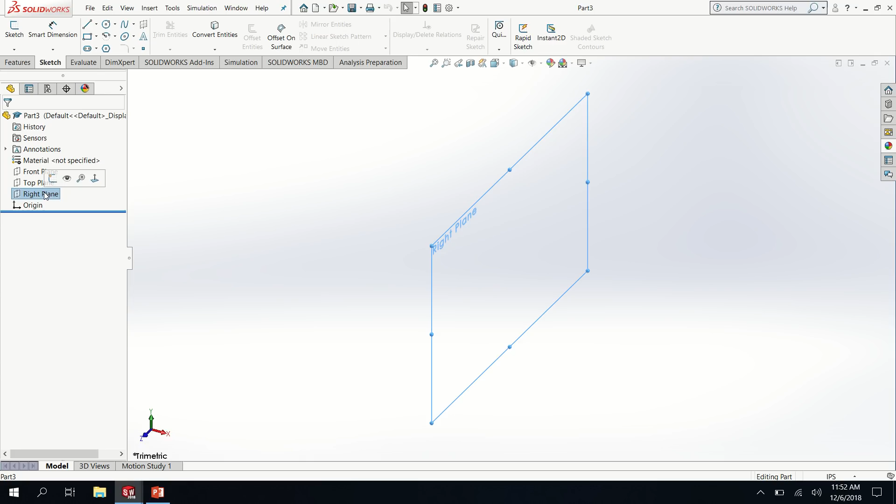Alright guys, today we're going to draw a wheel in Solidworks. And how we're going to do that is by starting with our right plane. We're going to go normal to that right plane, and then we're going to do a rough sketch of a circle. And we want our circle's diameter to be approximately 1.25 inches. And we're going to check mark that.

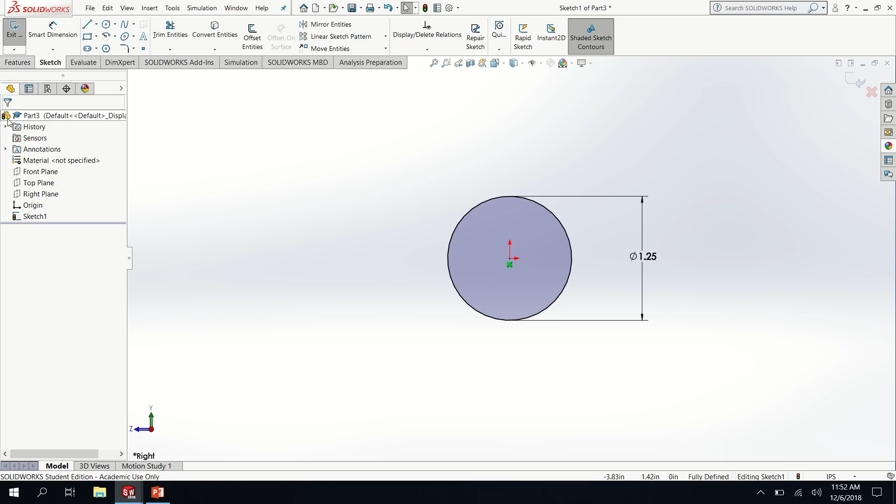And the next thing that we want to do is we are going to actually extrude boss base. And we want to extrude boss base about 1/4 inch. Alright, I'm going to go ahead and get that smart dimension in there too. The next thing that I'm going to do is I'm actually going to cut a hole in the center.

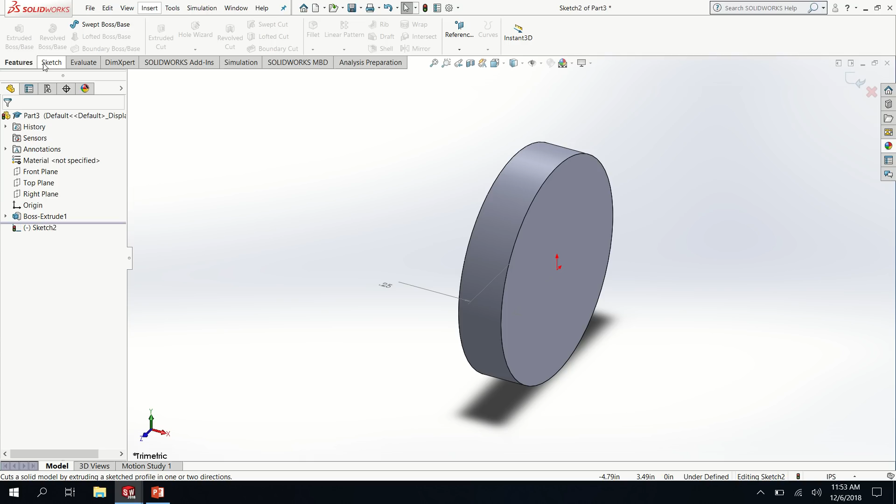And to do that, you go to Features, Extruded Cut. I've selected that item, and then there was a pop-up that asked me basically where do I want this sketch for this cut to be made. That's why it took me back to the sketch menu. And I want to do a circle again. Be normal to my sketch. I'm going to sketch another circle inside of this one.

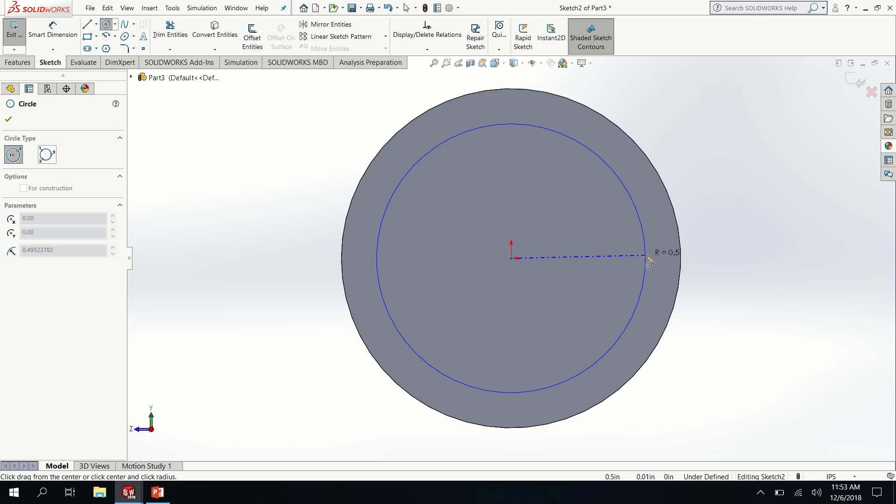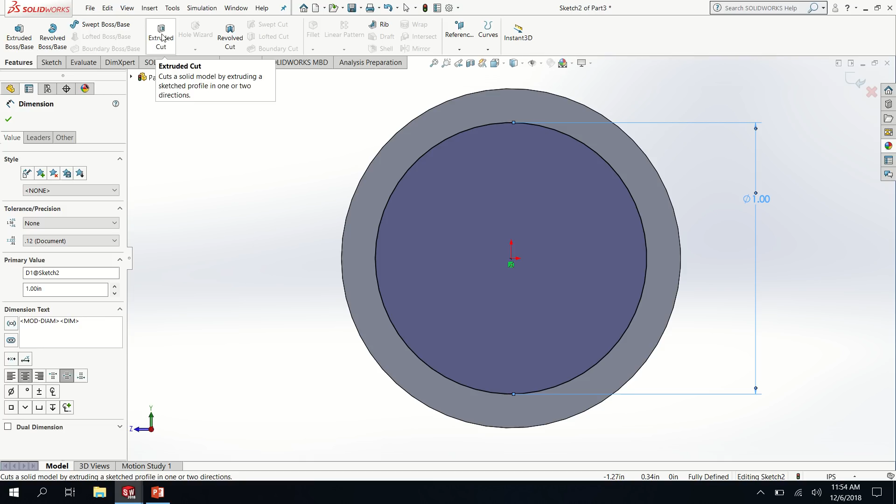And this one I want to be right at 1 inch in diameter, so a radius of 0.5. I'm going to check mark that. I'm going to dimension it. And then go back to Features and do an extruded cut. And if I leave it as through all, it's going to cut all the way through, which is what I want. So I have the beginning of my wheel.

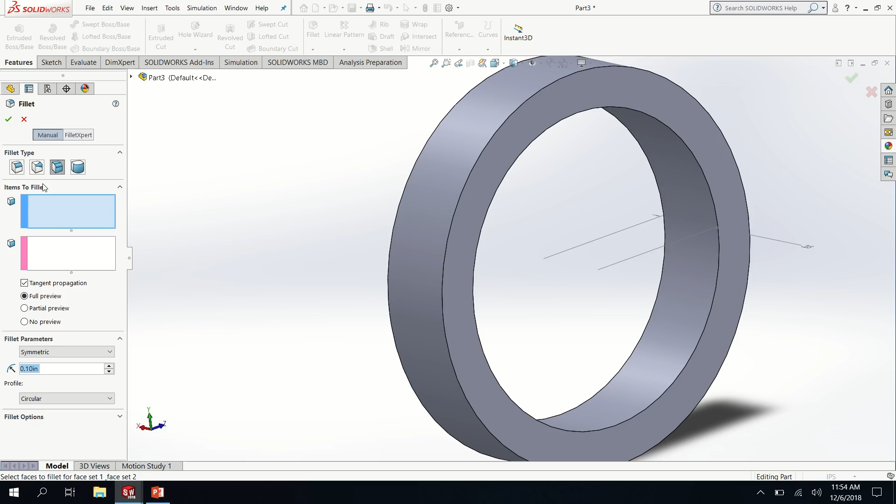Now the next thing I need to do is to make all of these flat edges rounded. To do that, I'm going to use a special feature called a fillet. And I want to choose the face fillet option. Here I'm supposed to select 2 things that I want to change. I want my curve to go from this edge to this edge. And I want it to be less than that 0.25 that I extruded. Actually, I want it to be 0.25 divided by 2.

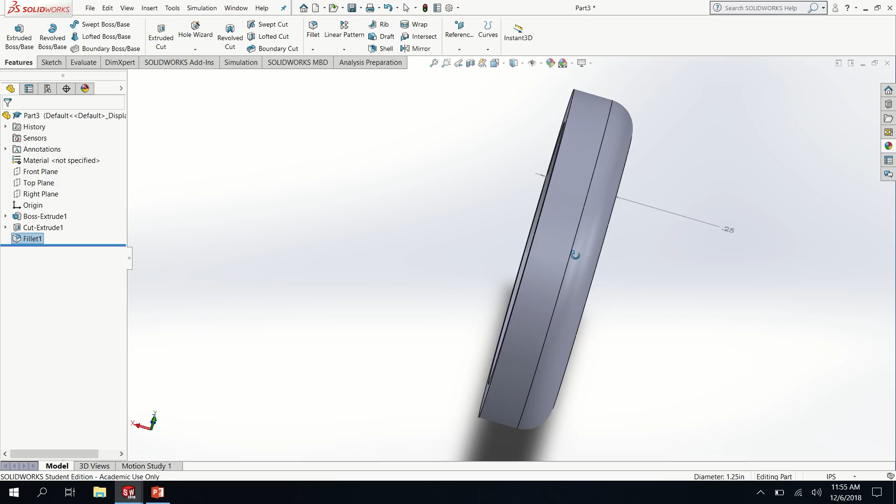I want that to happen first. And then I want to subtract a little bit, so a little bit's left in the center, 0.02. And I'm going to check mark that. And now you can tell that I have a rounded edge. I want to do the same thing to the other side. So I'm going to add an additional fillet. I'm going to go from this face to this second face over here

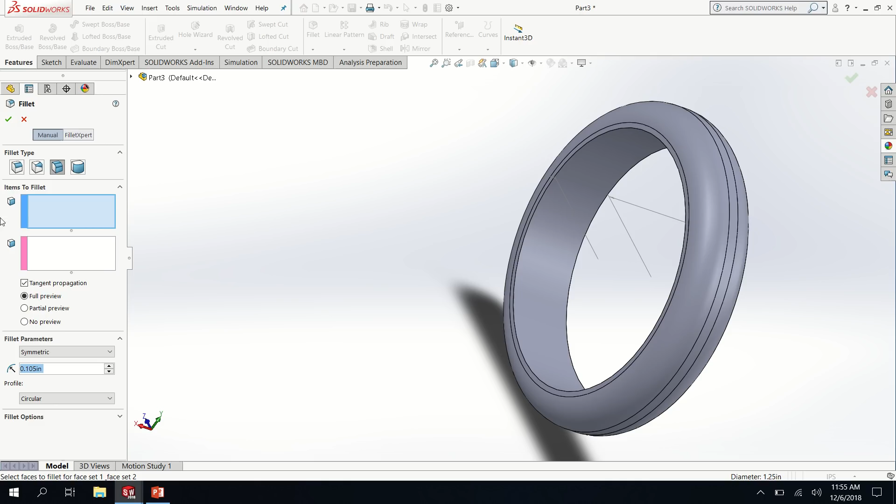and check mark that. Now you'll see here that I only have a little bit of room left to get the inside curved as well. So this time I want the inside to go to the outside, and my fillet isn't automatically showing up in yellow, so I know I'm going to have to change my size. If I do 0.02, I'm able to get a fillet in there. That's why I subtracted it out in the beginning.

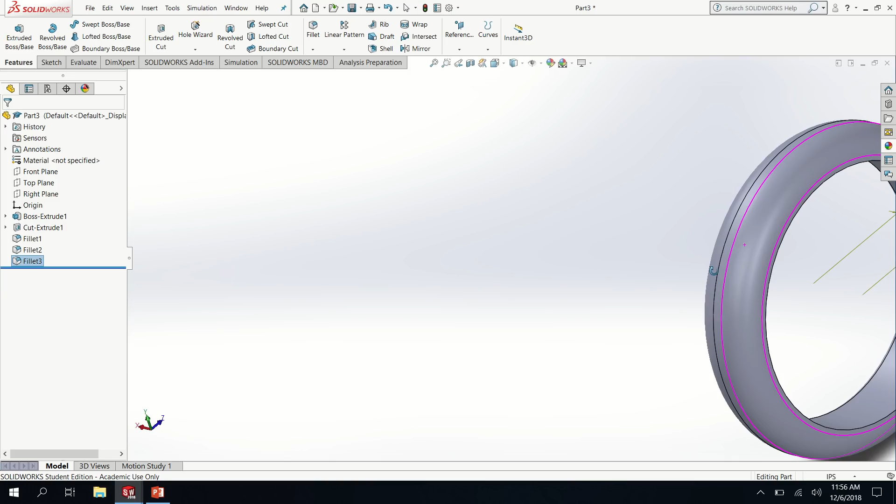And zoom to center. I'm going to zoom in a little bit. I'm going to add my 4th fillet. I want it to go from this face to this second face over here. I want it to be 0.02. And now I have a completely round wheel.

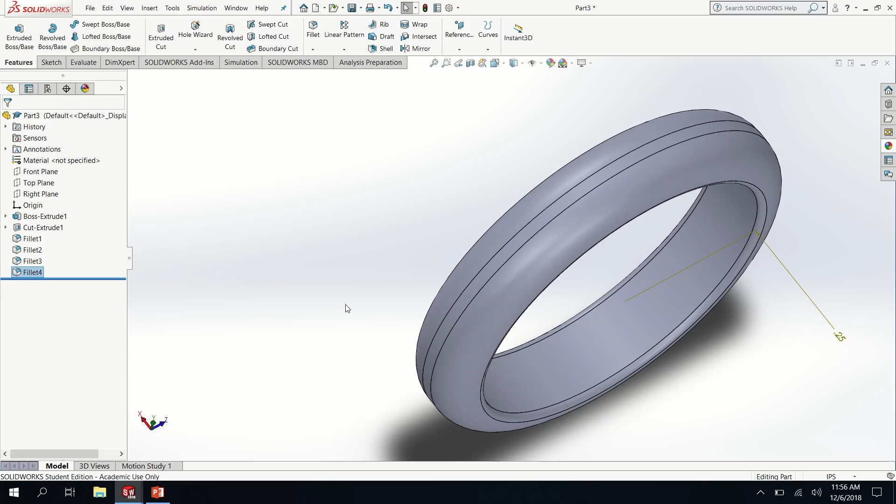To add the spokes in the center, this wheel was made on the front plane, so if we go normal to our front plane, you'll see what's going on. Normal to our right plane, this is where we can add the spokes. Now for these, I can do either a swept boss base, which as you can tell sweeps the closed profile along an open or closed path to create a solid feature, which sounds like a rib inside of a wheel, or I can do extruded boss base.

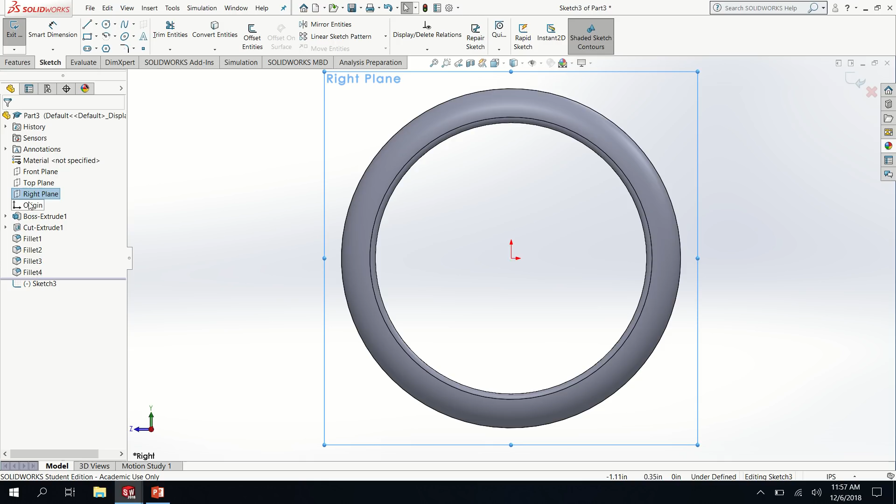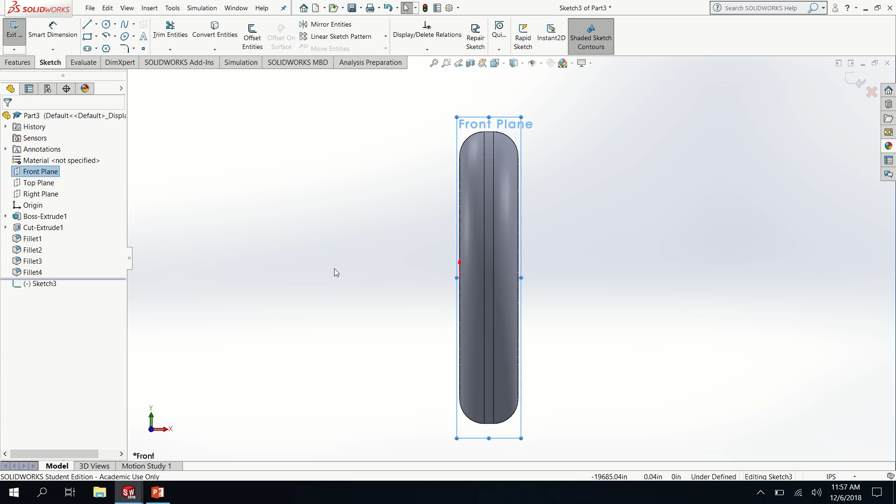Now it's going to ask me, I'm on the right plane, but that's not where I want my extrude to happen. I actually want my extrude to happen on this front plane. So what this means is if I can go from here to this side over here. And again, I want to be normal to that front plane. Now I might need to create a section view so I can see what's going on. I might also be able to do it from here.

To do the spokes, I want to sketch. So right now I'm sketching on the right plane, which is not what I want. So I'm going to escape out and I'm going to exit sketch to start back over. I'm going to do an extruded boss base. And I want to select that front plane. And now I should be able to sketch.

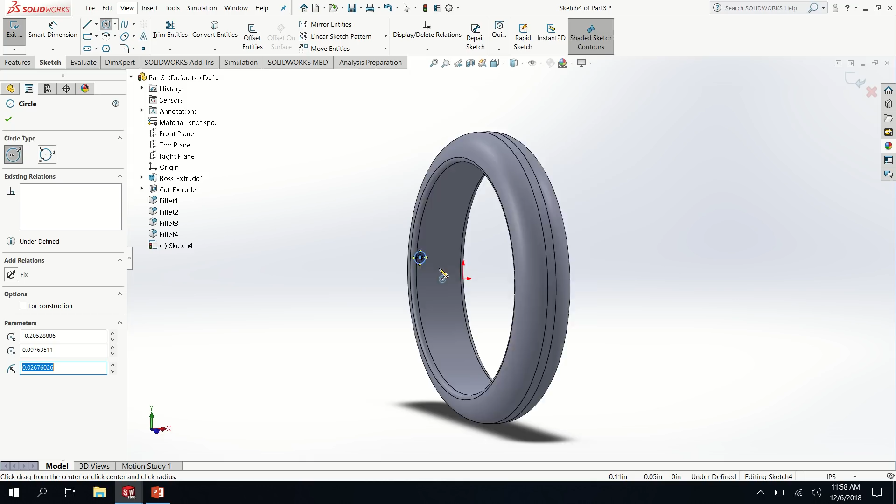Now this is going to be weird. I want a spoke, and I want this whole thing to move over. You can tell that I sketched it not on the wheel, which is going to be a little bit of an issue. So that's something I'm going to let you guys play with today.